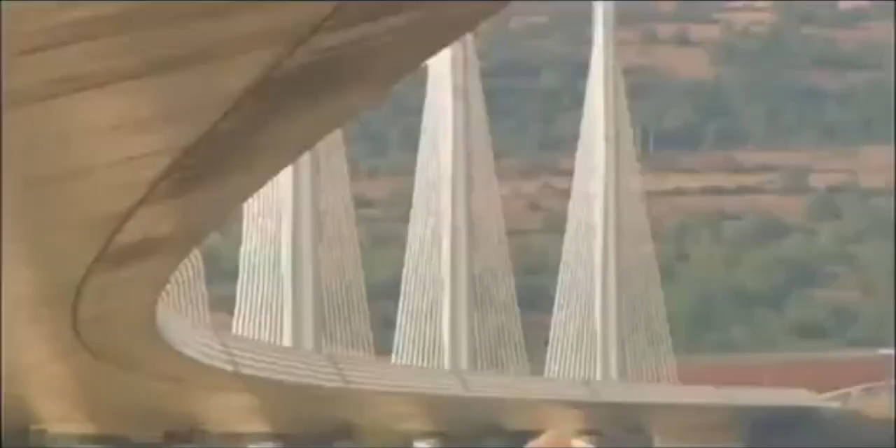This is the Millau Viaduct, the tallest bridge in the world. Its highest tower stretches a staggering 343 meters. So high, the bridge glides above the clouds. But this is a megastructure they said couldn't be built. When I've shown first the drawing of this bridge, they really thought I was crazy.

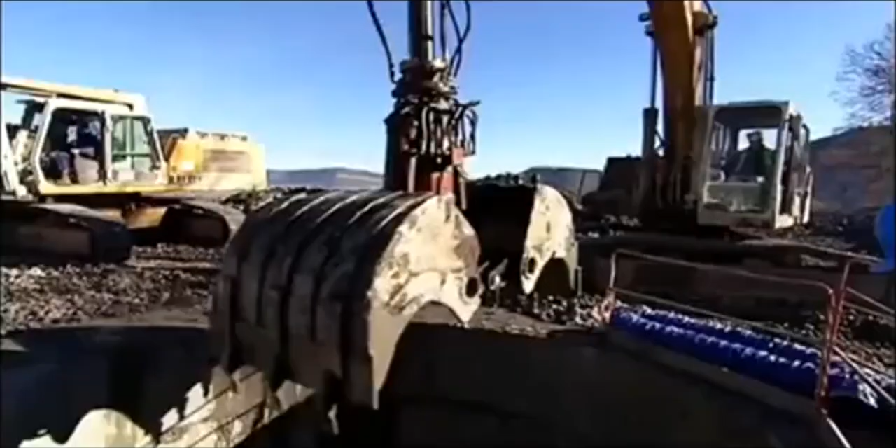The team attempting to build this amazing freeway in the sky had to survive landslides, fight winds gusting at 130 kilometers an hour, and weather massive storms as the bridge simply hung in the balance. It's a bridge that pushes the boundaries of engineering to the limits, and then beyond.

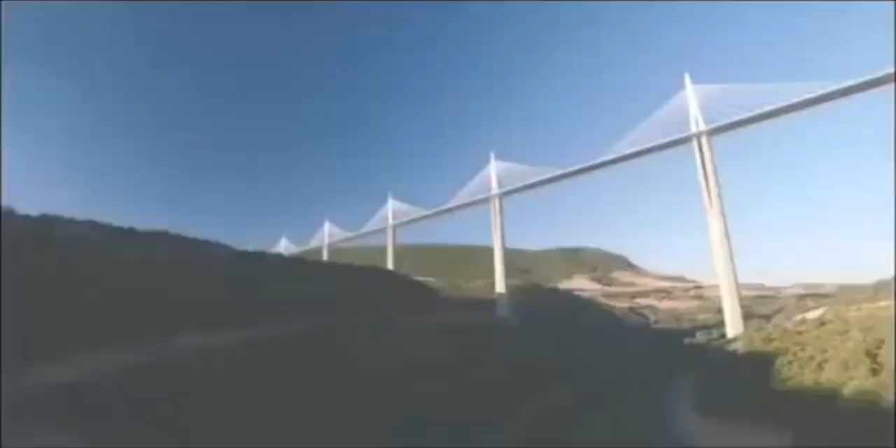Imagine building a series of Eiffel Towers, then slinging a 4-lane highway between them, all the way across one of the deepest valleys in France. Impossible though it sounds, that pretty much describes the building of the Millau Viaduct.

From the start, the construction team faced 3 daunting challenges. 1. Build the tallest bridge piers in the world. 2. Put a 36,000-ton freeway on top of them. And 3. Erect 7 steel pylons, each weighing 700 tons.

And what's more, they had to do this hundreds of meters above solid ground. So high that if you were on top of the Eiffel Tower, you'd still be looking up at this awesome bridge.

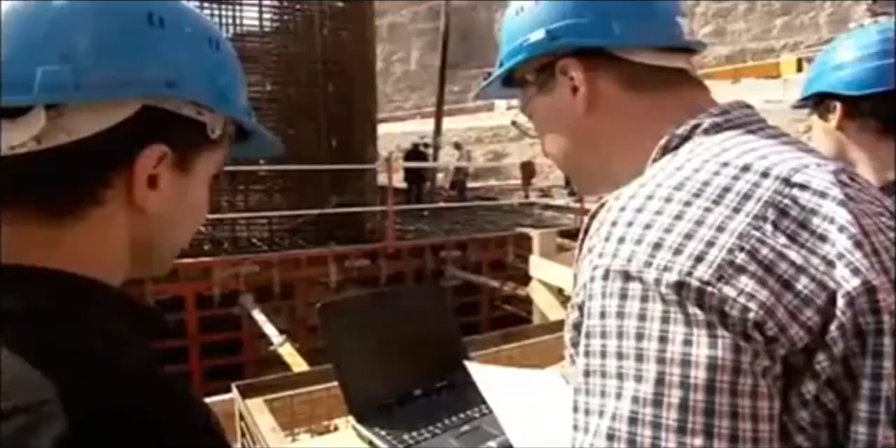October 2001, the team break ground. They're required to build a bridge that'll last for 120 years. And to win the contract, the teams promised to build it in record time, less than 4 years. By comparison, the world's longest suspension bridge, the Akashi Kaikyo in Japan, took a full 10 years to build. To up the ante, any delay will cost them $30,000 a day in penalties.

There are 7 piers that are numbered from the northern end of the valley. Number 1 will pose problems because of the steep slope. Number 2 will be the biggest challenge since it's the tallest. Crossing the river, number 3 is not much shorter. Then 4, 5, 6, and 7 climb the gentler slope to the south.

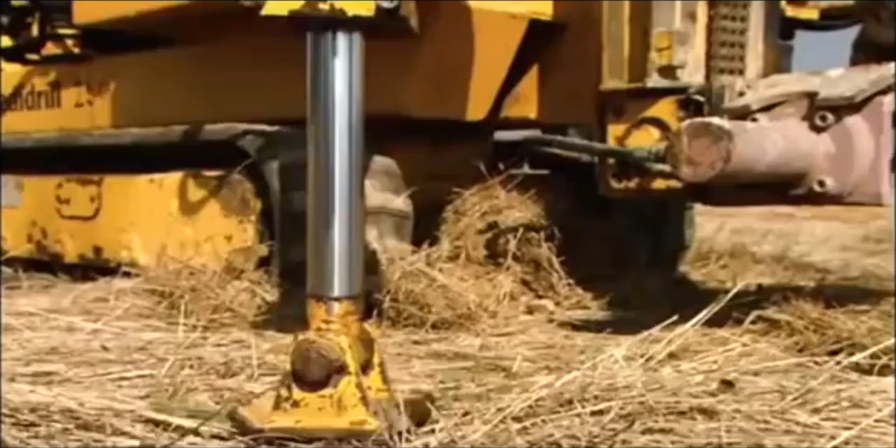To begin, the team had to bury the foundations deep in the bedrock in order to support the enormous weight the bridge will place on them. But the forces of nature were stacked against them. Geologists have warned of the risks posed by the region's fractured limestone. The rock is full of cavities that are essential to the local cheese economy. These cave systems, close to Millau, are home to a unique bacteria responsible for the blue mold in the world-famous Roquefort cheese. But what's perfect for cheese could be disastrous for a megastructure.

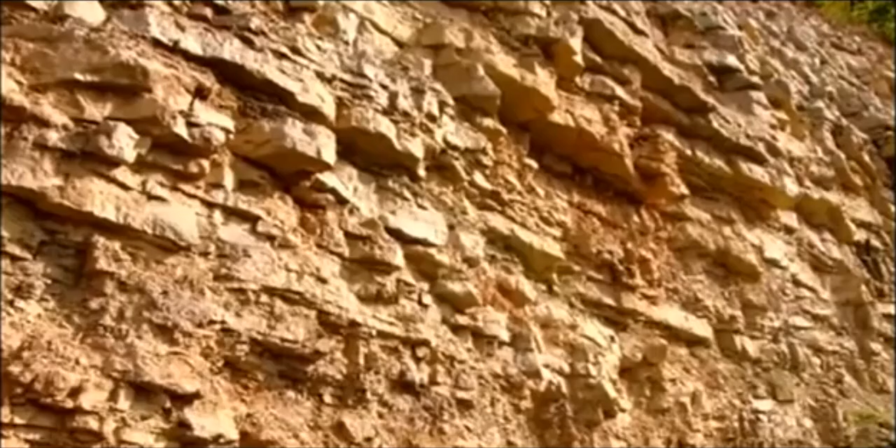The geologist's diagnosis spelt one thing: landslides. This kind of catastrophe could jeopardize the entire project. Despite the warnings, building went ahead as planned. Then, well into construction, as predicted, a dramatic storm causes a landslide. 4,000 cubic meters of rock collapse around Pier 1. Fortunately, the fallen rock doesn't damage the pier, but the warning is clear. They're forced to divert precious manpower and equipment to stabilize the slope and prevent a repeat collapse.

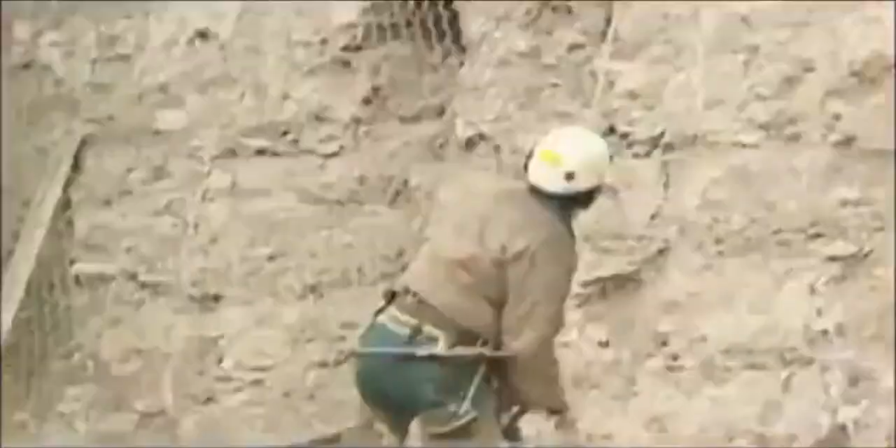So if the area is prone to landslides, why did they build the world's tallest bridge here in the first place? The answer is simple. In the 1980s, France built a freeway linking Paris directly with Spain. This major artery headed south across the French countryside, while from the Mediterranean, the freeway headed north, until they both hit one of the deepest valleys in France and stopped dead. Welcome to Millau, France's least favorite bottleneck.

The town of Millau is in the mountainous region of the Massif Central, one of the most tranquil parts of France. But in summer, this poor medieval town suffered traffic hell. The locals couldn't take it anymore. Neither could their mayor. It was terrible for our reputation. When you hear every day on the television and radio, avoid Millau, there's a traffic backup, a 5-hour wait in Millau.

And it's not just the people of Millau. Two drivers, Jamila and Jemima, crossing the 30-odd kilometers between the freeway on either side of Millau, reveal exactly why this bridge is needed. Jamila, in car 33, will cross the new bridge, while in car 22, Jemima will take the old road across the valley floor.

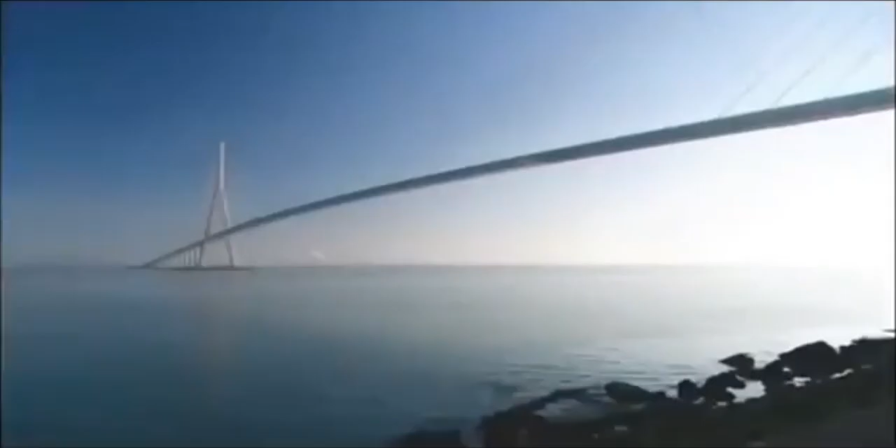It's clear exactly why the bridge was needed, but it took the French government a very long time to get round to building it. 12 years before construction began, up in Paris, the Ministry of Transport first came up with a plan. Their head bridge builder, Michel Virlogeux, is no ordinary engineer. He's a man who thinks big, very big, like the Normandy Bridge in northern France, the longest cable-stayed span in the world.

With this record-breaking structure completed, Virlogeux was on to his next, Millau. His plan, another cable-stay bridge, but pushing the technology beyond anything previously attempted, with piers 4 times higher than the Normandy Bridge.

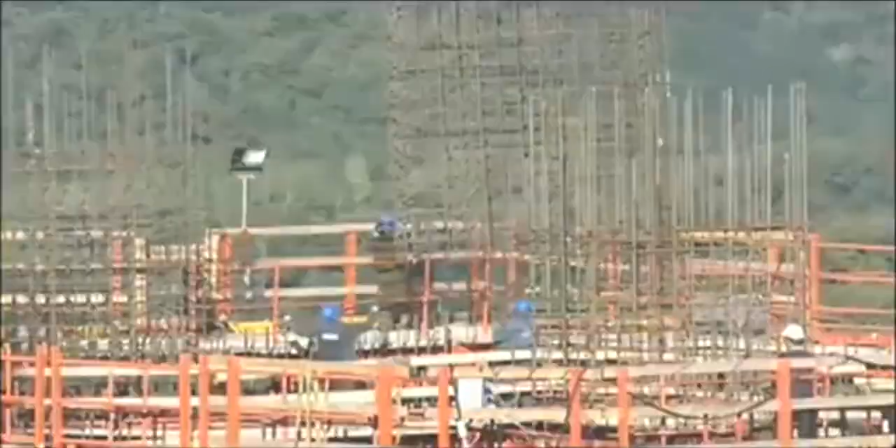The Millau Bridge would not only be the world's tallest, it would be unlike any bridge ever constructed. When I first showed the drawing of this bridge to the competent authorities, they really thought I was crazy. Virlogeux's Normandy Bridge has 2 sets of cables supporting the deck. But he wanted to up the stakes for Millau by losing 1 row of cables, so the remaining line would be forced to do twice the work.

More dramatically, the 2.5-kilometer Millau Bridge, instead of having a single main span, needed a whole series of piers to support it across the valley. No bridge builders had ever attempted a multiple-span, single-line cable-stay bridge on this scale before. The French authorities had a problem. Nervous about Virlogeux's groundbreaking scheme, they held a competition inviting other engineers and architects to compete with different designs.

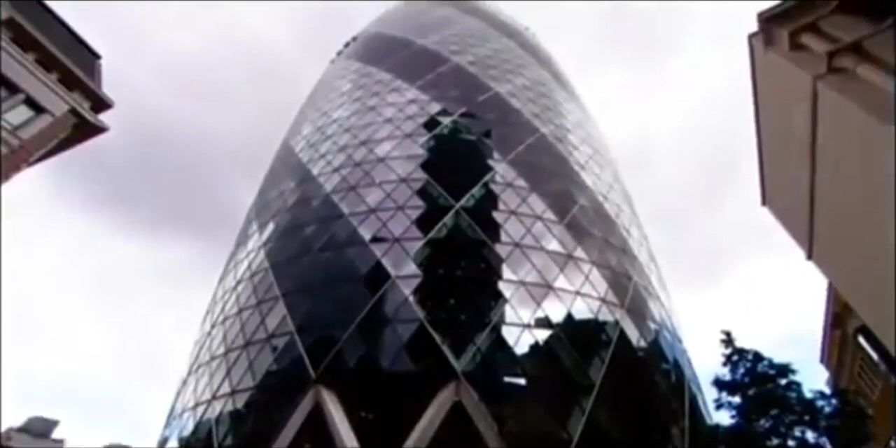The winner, Lord Norman Foster, is one of the world's superstar architects. In Hong Kong, he built the world's largest airport terminal. In Barcelona, offices literally hang from a mast on his communications tower. This is a man who regularly contemplates the impossible and delivers. You know, it's the challenges, and it's one challenge on top of another, on top of another. And with Millau, one of the biggest challenges was making it fit into the landscape, given it's just down the road from the famous Gorges du Tarn, France's equivalent of the Grand Canyon.

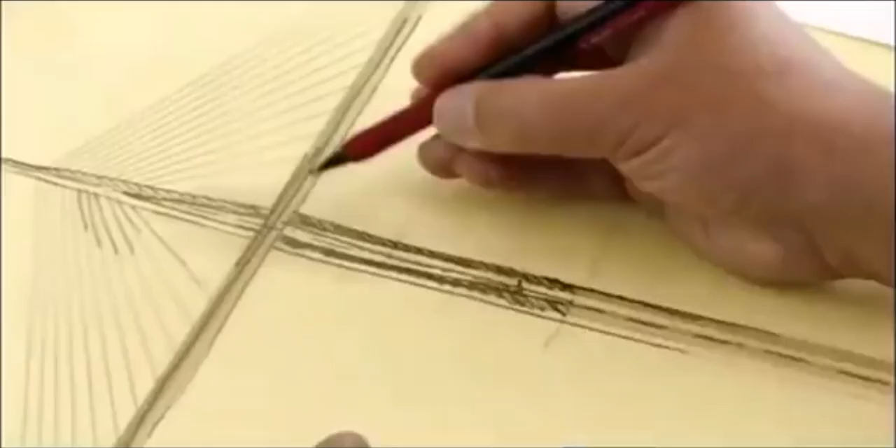How do you make something which has to be so immensely strong against the forces of nature look very gentle, very delicate? How do you weave something on that scale into the most unbelievable landscape? Ironically, Foster's answer was to take Virlogeux's pioneering scheme, then push it one stage further. He turned an elegant piece of engineering into a delicate work of art by boldly cutting out 2 of the 9 original piers and seriously slimming down the remaining piers and road deck. Foster wanted the bridge to appear as delicate as a butterfly, but this butterfly has to support the weight of 5 Eiffel Towers in gale-force winds hundreds of meters above the River Tarn. Getting the design wrong would be a disaster.

Then, with Millau still on the drawing board, Foster's record as a bridge builder suffered a major setback. His Millennium Bridge in London is actually another record-breaking structure, the lowest profile suspension bridge in the world. But when this footbridge opened to the public in June 2000, it was a public relations disaster. Crowds walking over it set up a resonant frequency, and the bridge began to sway. As people adjusted their step to the small initial wobble, the effect was magnified.

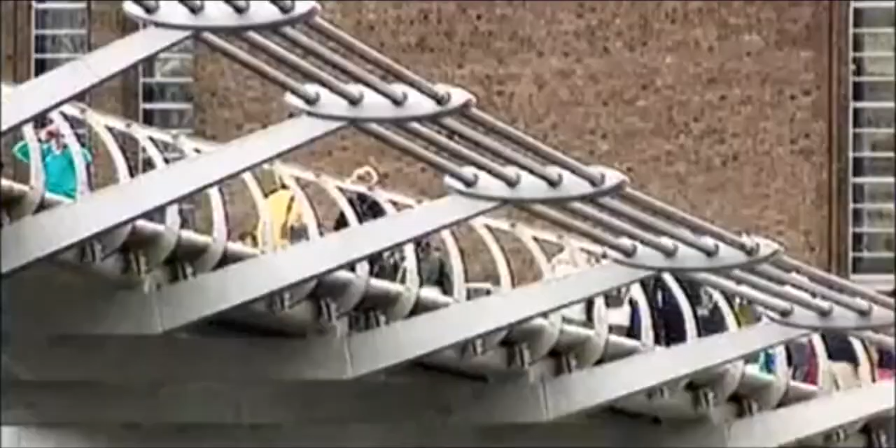Though it didn't threaten the structure, the swinging motion became so dramatic, the authorities closed the bridge for a refit that took 1.5 years and ended up costing over $8 million. It was a bad omen for the Millau Bridge, where construction was soon to begin. And at 15 times the height, a design flaw would be a catastrophe.

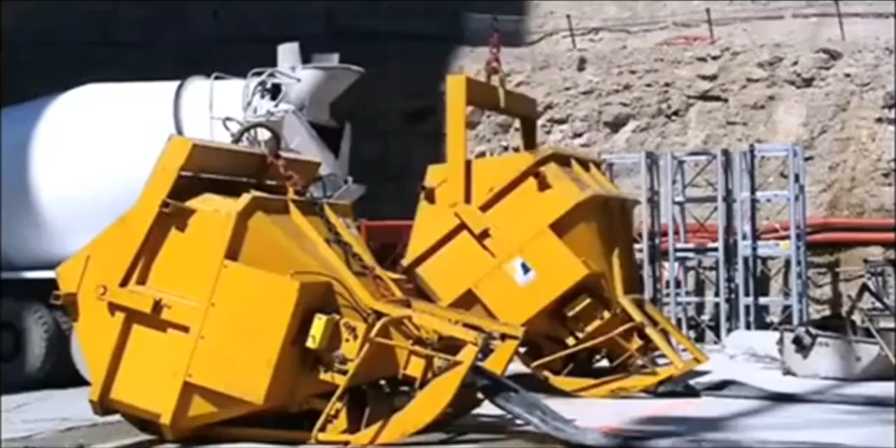December 2001, France's Millau Viaduct, the tallest bridge in the world, is under construction. Everything about this project is supersized. It'll need 200,000 tons of concrete, so much that the team have to build a concrete factory on site. But there's nothing straightforward about this concrete. The formula must be just right. It needs structural strength to support the massive loads it'll have to bear. But it can't set too quickly, as it has to be hoisted into position and poured hundreds of meters in the air. And it needs to be just the right color to suit Norman Foster's vision.

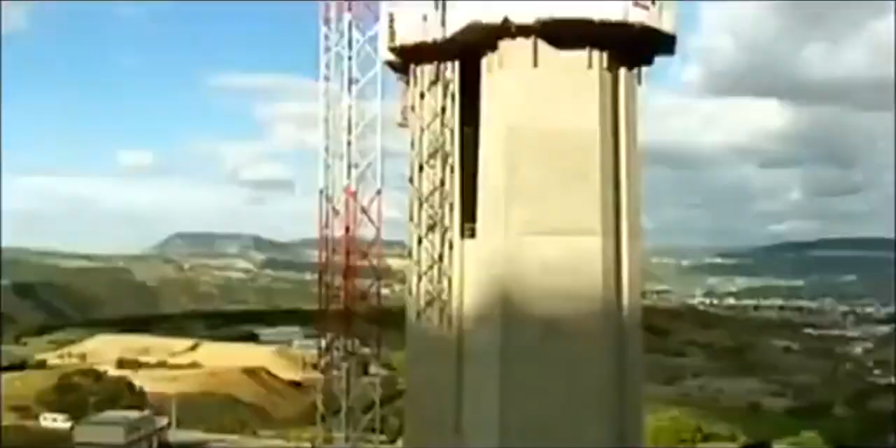In fact, the architect's vision has created a headache for the construction team. He's designed each pier as a complicated geometric shape, tapering the entire way up, with vertical grooves set into them to create shadows. But what's just a line on paper for the architect was a major challenge to build. The enormous piers are built step by step by pouring concrete into a temporary mold. To give the required strength, the molds are filled with a frame of steel reinforcing bars. In total, 16,000 tons of these steel bars are hoisted into place and secured. Laid end to end, they'd stretch the 4,000 kilometers from Millau all the way to Central Africa.

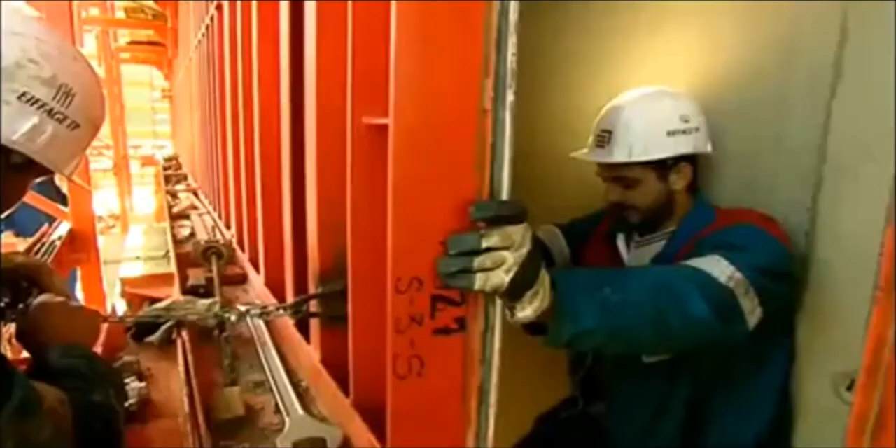The shape of each pier is seriously complicated. As a result, each time they remove the sections of red steel shuttering, they have to change the shape of the mold to fit the profile of the next 4-meter section. Manhandling these steel panels, weighing up to 15 tons apiece, is no picnic. And with the combined height of the 7 piers totaling well over a kilometer, they have to change the shape of the mold over 250 times.

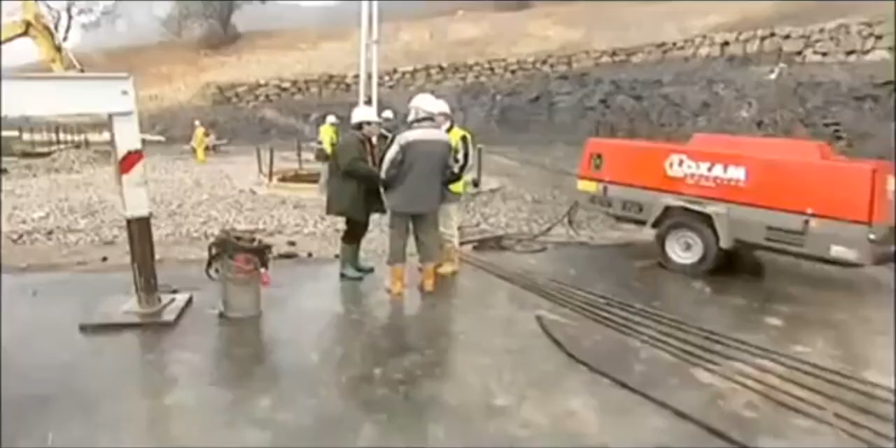Every 3 days, each team on each pier went through this whole cycle. Then they repeated the process. But it was a race against time, with a permanent threat of delay. Keeping the entire build on time and to budget was the daunting responsibility of one man, Jean-Pierre Martin.

If instead of 3 days we took 4, imagine that multiplied by the number of castings. We'd end up with a 3 or 6 month delay. With a penalty of nearly $1 million a month, this isn't something Martin wanted to contemplate. And this schedule wasn't his only headache.

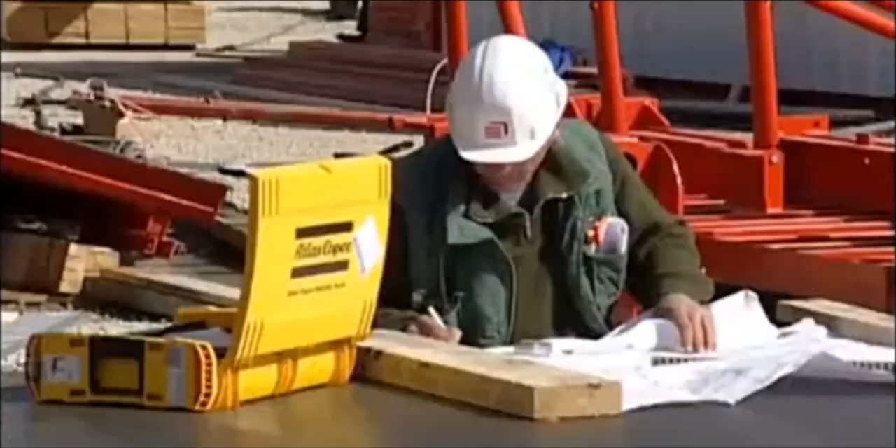You have to be pinpoint accurate when you're building the tallest bridge piers in the world. Get it wrong, and the bridge simply won't fit together. Just 10 centimeters out, about a hand's width on each 4-meter section, and the tallest pier could be 6 meters off at the top, the width of a jumbo jet fuselage.

Each team was aiming for a specific point in the sky. For Pier 2, this was exactly 245 meters above the ground, 546 meters from the north side, and 1,914 meters from the southern end. There was no room for error.

The only chance they had to get it right was with GPS, accurate to within 4 millimeters. Using signals from multiple satellites, the team could pinpoint their position and make sure they're on target for that critical point in the sky they needed to hit.

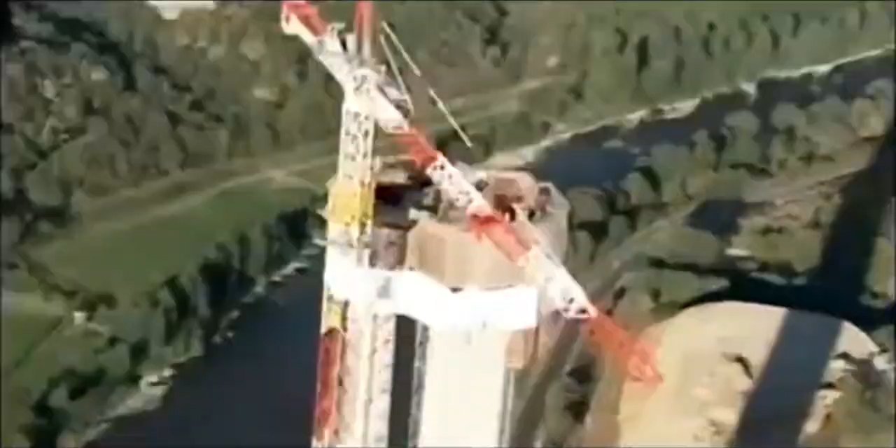Month after month, the piers climbed higher. Finally, by November 2003, they reached their full height. At 245 meters, Pier 2 becomes the highest bridge pier in the world. But is this record-breaking pillar where it's supposed to be? Amazingly, it's dead on target, to within 2 centimeters.

Champagne corks pop. It's time for a major celebration. Against all the odds, they were 1 month ahead of schedule, but the team couldn't afford to relax. The next stage of the project would be the most difficult part of the build.

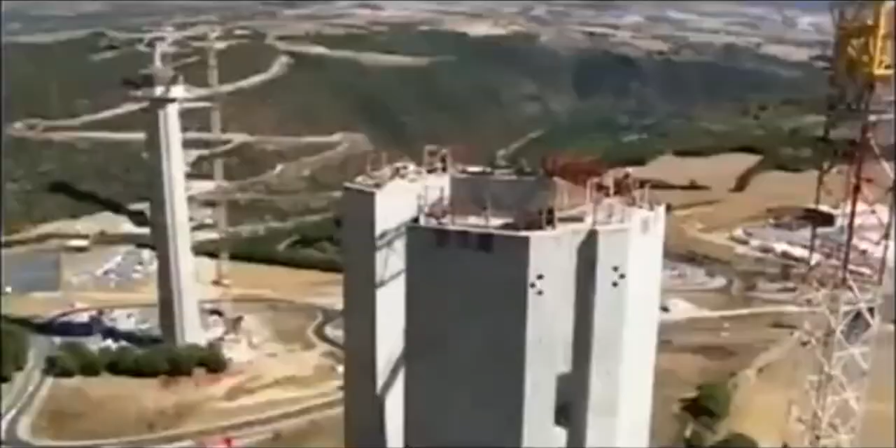Phase 2 of building the world's tallest bridge involved putting a 2.5-kilometer roadway weighing 36,000 tons on top of the piers, a full 270 meters above the River Tarn. Bridge builders know danger comes with the territory, but working at these heights can be lethal.

More than 34 died constructing New York's Brooklyn Bridge. 35 died in 1970 on the Westgate Bridge in Melbourne, Australia. And 1 year later, 13 workers were killed when the Koblenz Bridge in Germany collapsed into the Rhine.

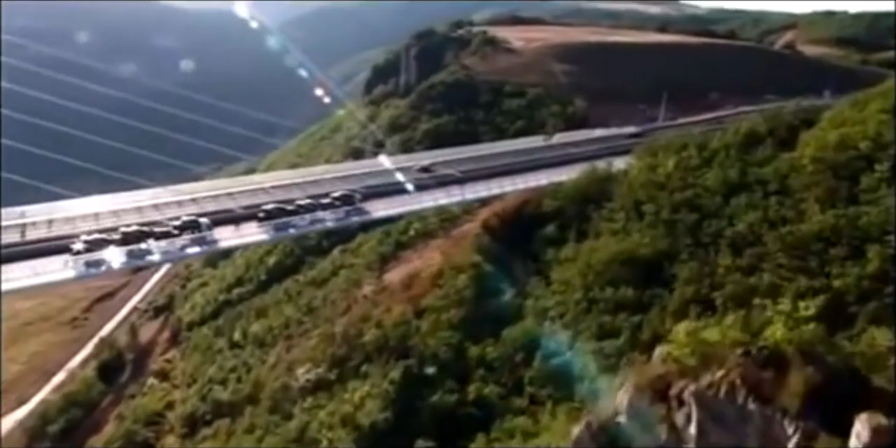With these fatalities in mind, the team decided to fabricate the entire road deck on the safety of solid ground. This meant building it in steel, which in theory would be much safer than lifting vast concrete sections hundreds of meters into position. There's only one problem with this plan. No one had ever put a road deck on piers anything like this height before, let alone over a 2.5-kilometer span.

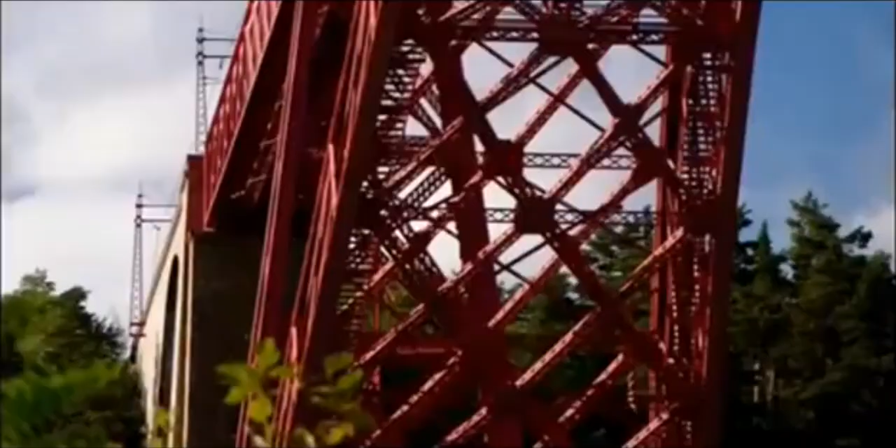In the end, only one steel manufacturer had the courage to take on this colossal challenge. Eiffel, the steel firm set up by the great French engineer. Eiffel built what was once the tallest bridge in the world, the Garabit Viaduct in southern France, before getting round to the framing for New York's Statue of Liberty and, of course, his signature tower in Paris.

But despite the company's experience, Eiffel's director, Marc Buonomo, knew he was taking a serious risk. It was a gamble for the company, because if there had been a mistake, if it hadn't worked, it would have been the whole company.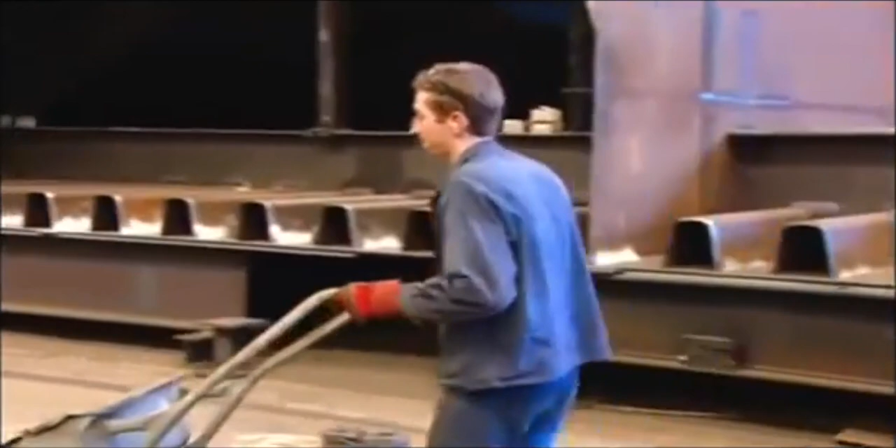They fabricated the massive sections that would make up the road deck in the company's steel factories. This immense jigsaw puzzle involved manufacturing 2,200 separate sections, weighing up to 90 tons, and some of them 22 meters long. Their accuracy is measured with a laser to within a fraction of a millimeter.

The huge square tubes are the central spine that should make the deck rigid. The triangular side panels will be welded on either side to create the width for a 4-lane highway. To meet the punishing schedule, Buonomo automated the manufacturing with a 2-headed welding robot and a plasma cutting machine.

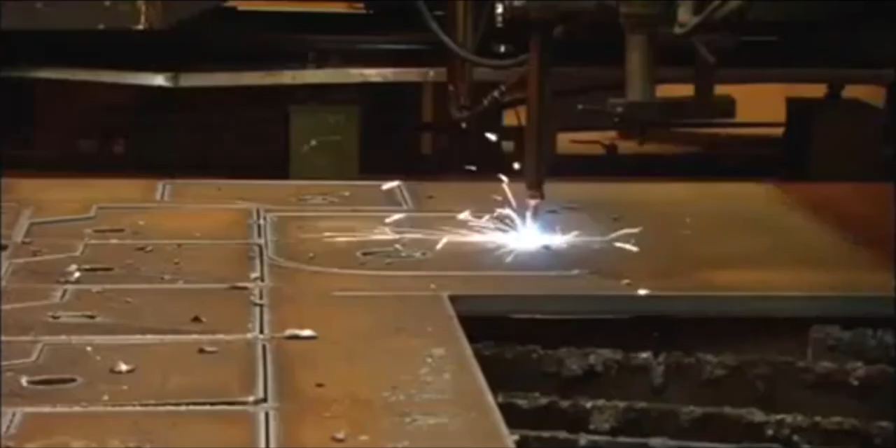Each cutting pattern or template is programmed into the computer. Then the machine automatically blazes its way through the steel. The torch reaches a scorching 28,000 degrees centigrade. That's 5 times the temperature of the Earth's inner core.

But cutting and welding was the easy part. The hard part was getting these monster sections the hundreds of kilometers from the factories to Millau. The routes had to be planned with precision to avoid major damage. The police coordinated safety and clearances.

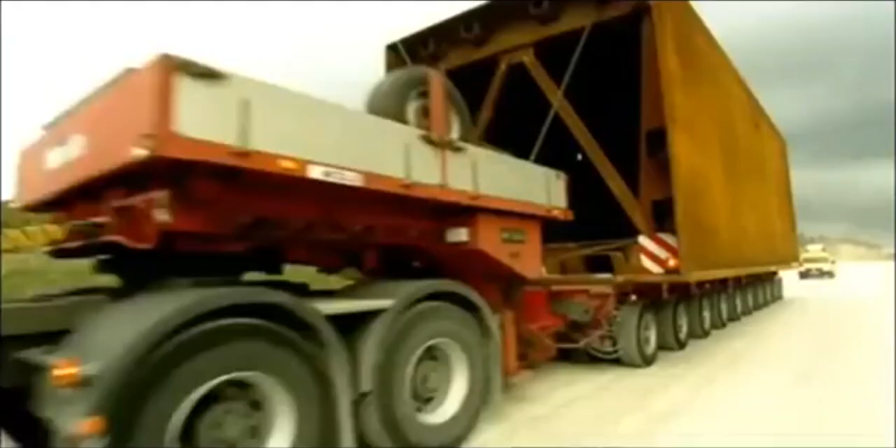Even with that level of preparation, some obstacles felt as if they're cutting it just too close for comfort. And this was no one-off event. To build the viaduct took over 2,000 of these extraordinary road convoys.

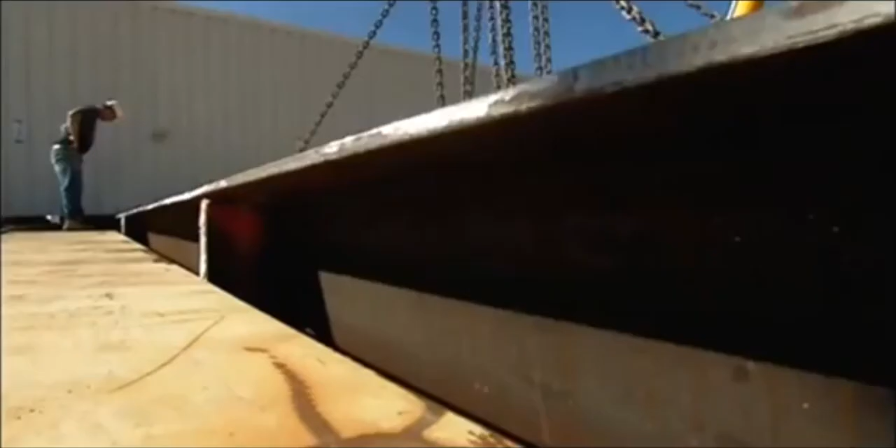The components arrived at assembly plants set up, one on either side of the valley. Here, the pieces of a massive jigsaw puzzle were welded together to form the 2 halves of the deck. But getting these 2 halves to span the valley, on top of the world's tallest bridge piers, would be a major challenge. They'd be the first team to put a road deck on a pier taller than an 80-story skyscraper.

And pushing bridge building beyond anything attempted before, they planned to slide the entire 2.5-kilometer road deck over in 2 colossal pieces. The bridge's chief engineer, Jean-Marie Cremer, was one of the few people who believed it could be done. All the engineers who know this method, who were in the know, didn't believe it was possible. If the team had got their calculations wrong, the entire structure could collapse into the valley.

We found a solution for the construction, which was to launch the bridge from the 2 sides. One part on the Larzac Plateau, one on the Causse Rouge. And to push them from the 2 sides, and to make them come and meet here, above the River Tarn.

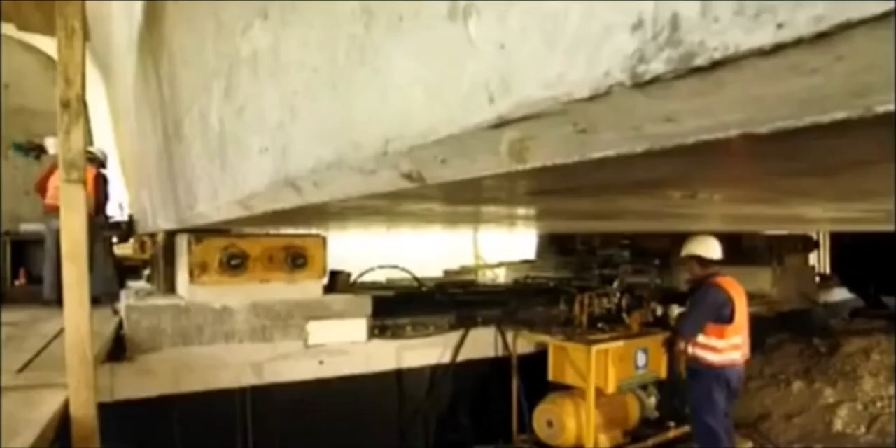Smaller bridges use a similar technique. A powerful set of hydraulic rams literally pumps the deck from one side to the other. But Millau would be the longest launch ever attempted over the highest piers in the world, and the results could spell disaster. The deck is so slender, it would bend and collapse if it were pushed out over the 342-meter spans between each pier. The furthest anyone's previously managed is less than half that distance.

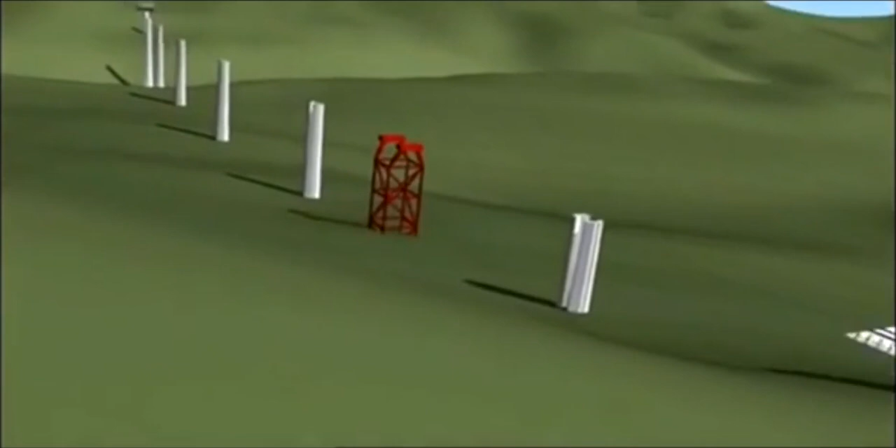The first part of the solution was simple. Fit a pylon so its cables support the front of the deck as it goes out over the valley. Then construct temporary steel support towers that halve the spans to a more manageable 171 meters. These steel towers were a construction feat in themselves. The largest, over 170 meters high, is the tallest ever built, and they needed to carry a massive load.

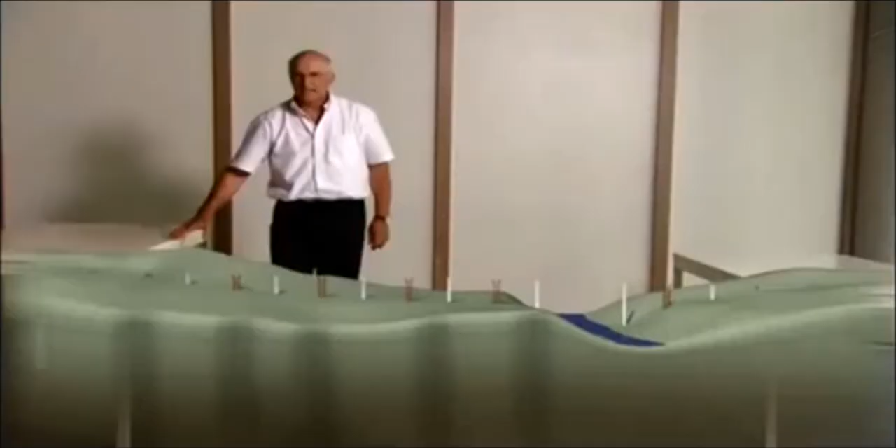7,000 tons as the leading edge of the deck, together with the first 90-meter pylon, slide over. And simply pushing this enormous weight over the top of the vulnerable piers would bring them crashing to the ground. This was the nightmare scenario. If we'd done a conventional launch, we would have knocked the piers over like the pins in a bowling alley.

Someone needed to reinvent the way this type of bridge is built. And it's Marc Buonomo with Jean-Marie Cremer who came up with the breakthrough. The basic principle can be demonstrated with a heavy box and a wobbly table. With a normal launch, you knock over the piers. I want to advance the deck over the pier, but if I push the deck from here, I'd knock over the piers, because they're so tall.

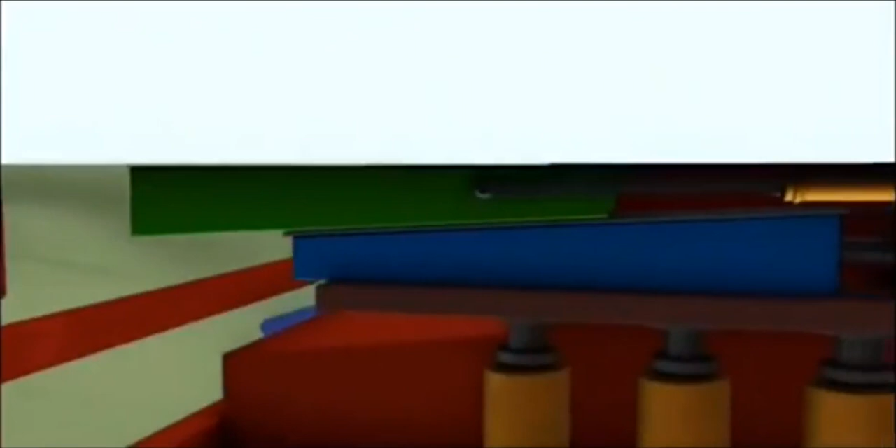The idea is to install a launching system on top of the pier, and that way, if I push the deck, it has no effect on the stability of the piers, and the piers won't fall over. The trick is to use a series of these launching systems to jack up the deck and inch it forward. Each system uses two wedge-shaped blocks under each side of the deck. The upper wedge is pulled forward by a hydraulic ram.

It slides up the slope of the lower wedge at the same time, lifting the deck from its supports and advancing it 600 millimeters. The lower wedge then retracts, dropping the deck onto its supports. The upper wedge returns to its original position, and the whole cycle begins again. 4 of these clever devices are placed on each pier, all programmed to work at exactly the same time. The result is that together, they pick up the entire roadway and shunt it forward.

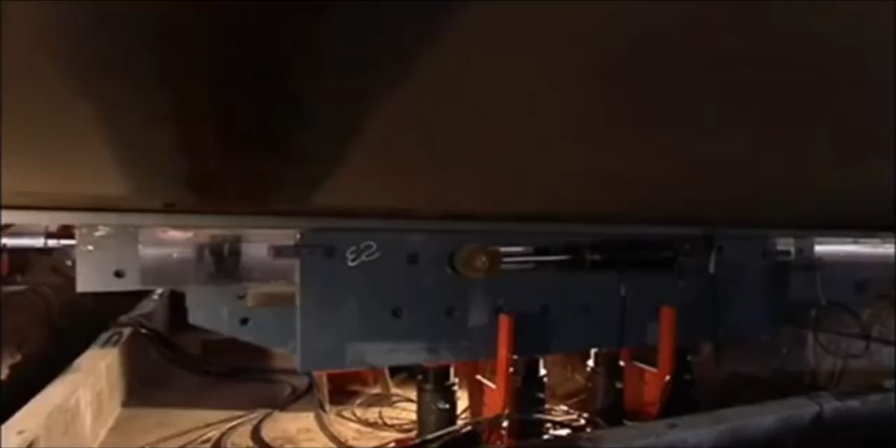But if one fails or gets out of step, it could spell disaster. The force could push the bridge piers apart till they collapse. When you're up there and you see Millau 300 meters below you, you ask yourself, was this a good idea? The future of the entire project was now hanging on a prototype, and it had never been tested.

It's the morning of February 26, 2003. Do or die day for the world's tallest bridge. Everything is about to be put to the test. The flexibility of the deck, the strength of the temporary piers, and critically, the pioneering hydraulic ram system. Even Buonomo, the man in charge of the launch, had his doubts. As it had never been done before, I have to tell you, I had fears that it wouldn't work.

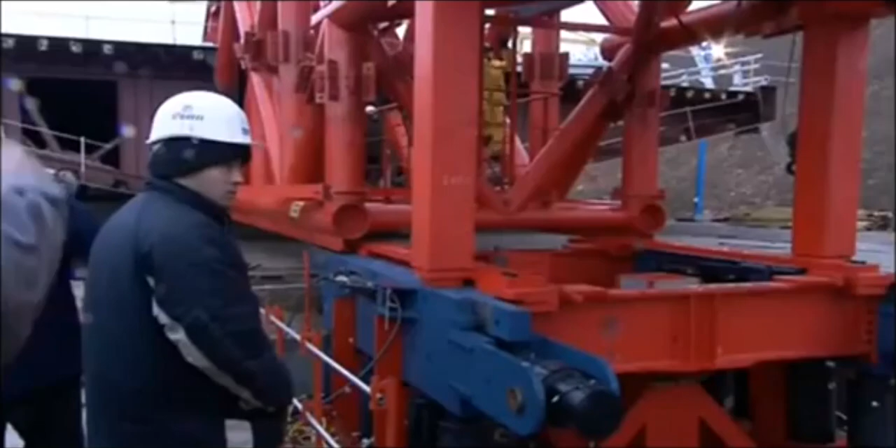The pumps kick in, the pistons start to push, and the deck begins its huge journey across the valley. The moment I heard the motors start, I put my finger on the deck, and I could feel my finger move. Every 4 minutes, the deck advanced 600 millimeters across the valley. Surveyors tracked its progress. But it was still a nail-biting time as they watched the unsupported deck crossing the void.

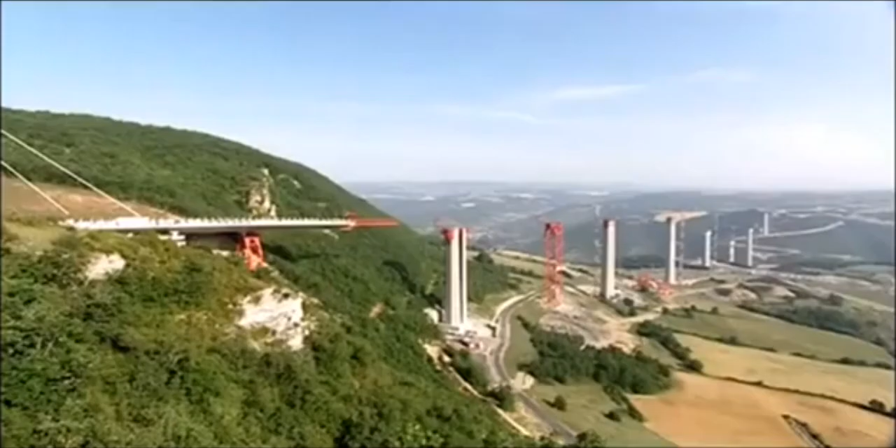Eventually, the deck reached the safety of the first pier. 204 meters down, only 2,256 to go. The launching system seemed to be working as planned. The engineers were feeling optimistic.

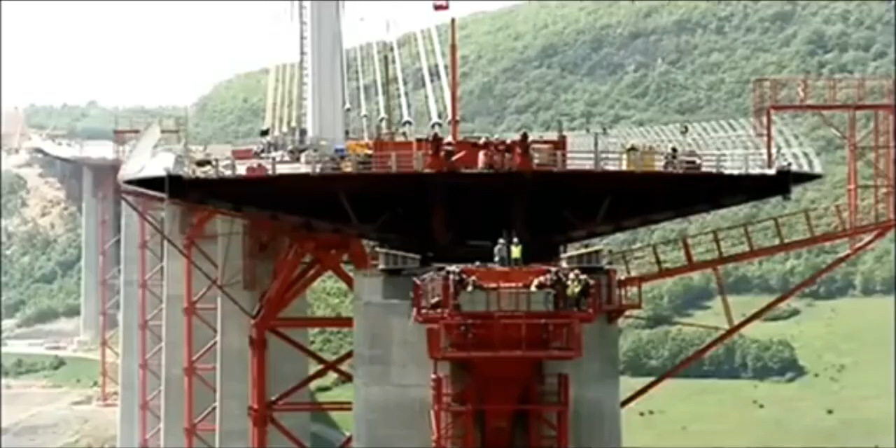But as the deck advances into space, it'll become more vulnerable to the wind, which can reach 130 kilometers an hour. Unfortunately, the road deck has the shape of an upside-down airplane wing, and the team's greatest fear is that this wing could simply take off.

The engineers kept a close eye on the wind and weather conditions. When they were satisfied there was a 3-day weather window and the wind wouldn't exceed 85 kilometers an hour, they'd give the construction team the go-ahead, and the deck launch could continue. The reason for this precaution is simple. Strong winds can literally tear a bridge apart.

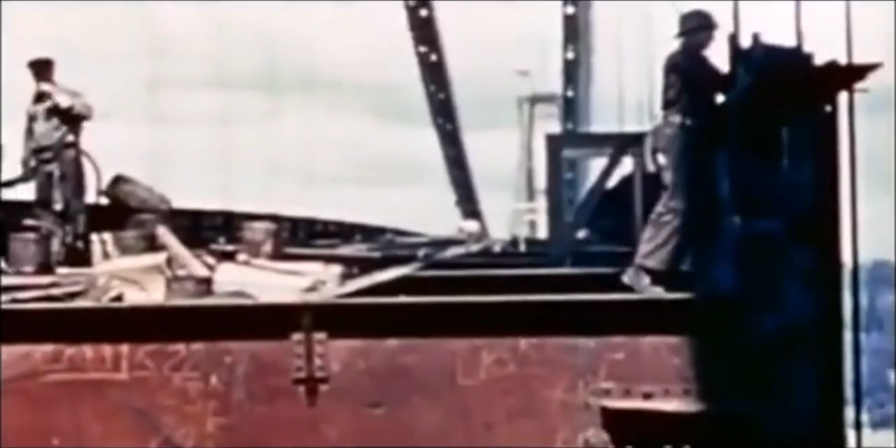In 1940, Washington State built a suspension bridge across the Tacoma Narrows in the U.S. Northwest. It opened with a grand ceremony on July the 1st. But the celebrations were short-lived. The bridge had a major problem: the wind.

Girders beneath the deck, designed to make the bridge rigid, actually blocked the wind, causing the roadway to ripple alarmingly. Locals soon dubbed it Galloping Gertie. On the 7th of November, with the wind less than 70 kilometers an hour, the bridge begins to twist violently. At 11 a.m., time runs out for Galloping Gertie. The wind sends the bridge crashing into the river.

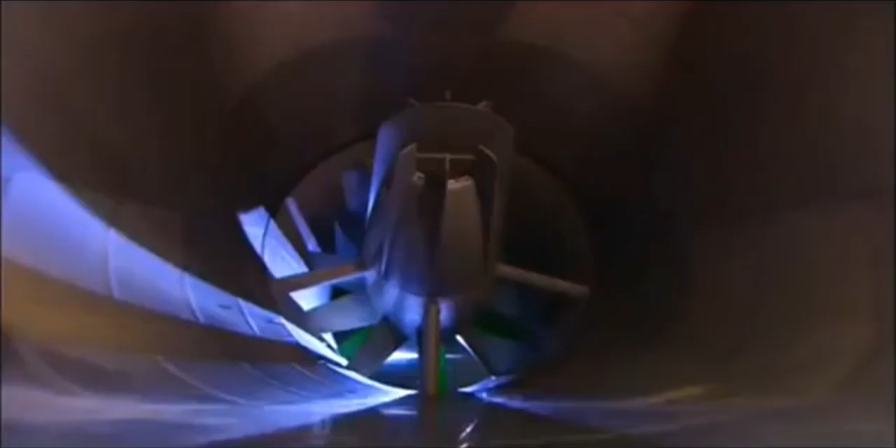Wind tunnel testing is now standard procedure as a direct result of Galloping Gertie. For the Millau Bridge, they analyzed the wind in the Tarn Valley over 18 months, then recreated those conditions in the wind tunnel. Wind engineer Olivier Flamand was shocked by the results. The average wind speed was relatively low, but because there's such strong turbulence, it created very fast peak winds.

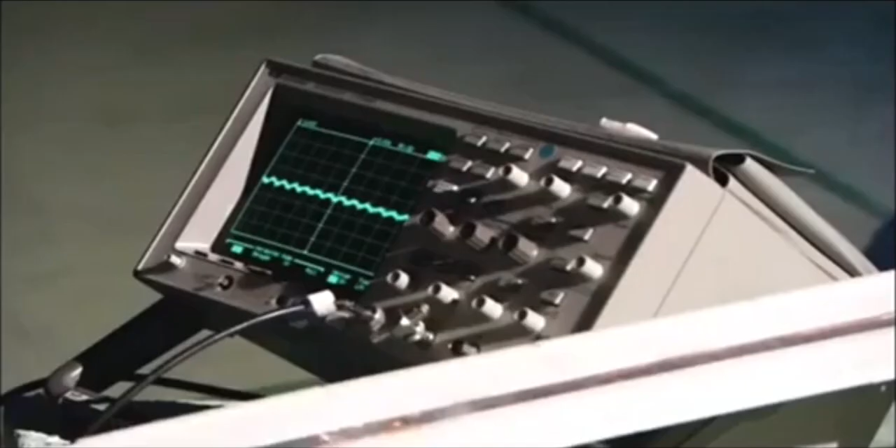The rugged terrain creates serious turbulence at the height of the road deck. Winds peak at 130 kilometers per hour. That's hurricane force. They tested every aspect of the bridge to analyze the risks: piers, pylons, and critically the deck. But it's not just the aerodynamics of the finished bridge. They needed to find out how it would behave when it was most at risk, during the launching of the deck.

Olivier and his team reached a chilling conclusion. The winds they've measured are strong enough to blow the unsecured deck off its supports and send it crashing hundreds of feet to the valley floor. And then the nightmare began. On the 22nd of August 2003, 6 months into the deck launch, one of the launch systems failed, leaving the deck hanging in the wind. To make matters worse, the weathermen were predicting storms.

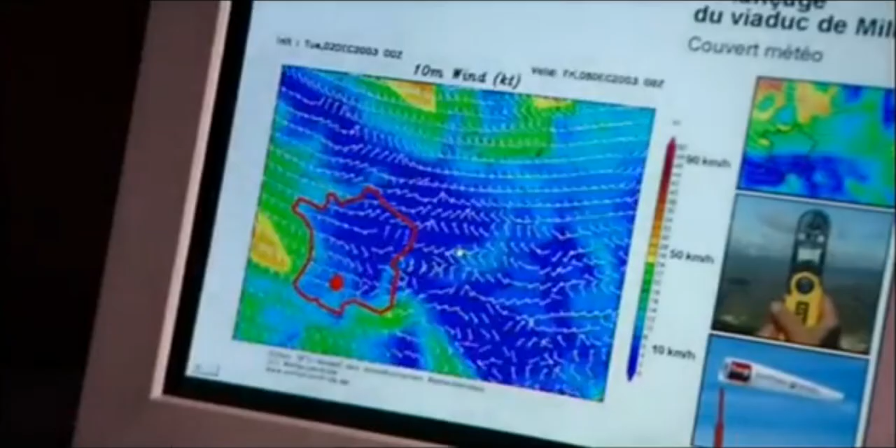So far, these massive pushing machines had worked perfectly. But the fact is they were prototypes, and due to the frantic schedule, they'd never been tested. The problem was that the non-stick Teflon between the sliding surfaces had ripped, and the friction generated was too much for the hydraulic rams to push against. Unfortunately, no one had planned on replacing parts of this monster machine mid-launch on the top of a massive concrete pillar. This was very bad news for the man who staked his reputation on this system.

It was maximum stress, like poison in your mouth. You don't forget that. Re-examining their calculations, they realized the cause of the problem. It underestimated the forces between sliding surfaces, but they wouldn't be able to repair it without the necessary spare parts. The clock was ticking, and Marc Buonomo needed a solution fast.

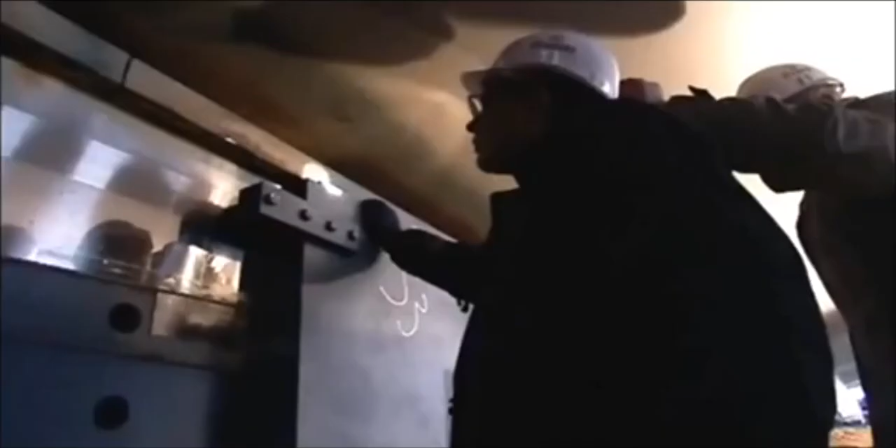When Apollo 13 came back with that incident, the NASA engineers requested they did the inventory of everything there was on board to know how to fix it. The Millau team did an inventory. They realized that the other launching machines, not yet being used, could be stripped to provide the new Teflon surfaces they needed.

Working all through the night, the team extended the access platform. This allowed them to take out the 5-meter-long, 2-ton steel wedges, replace the Teflon, and reassemble the launching machine. By 8 a.m. the next morning, it was ready to resume the launch.

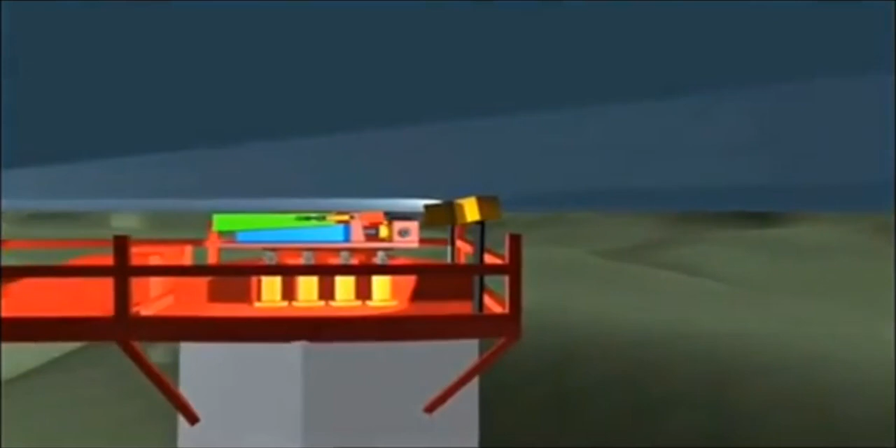The rest of the week, the predicted storms arrived, and another set of launching machines wore out. So when the deck finally made it to the safety of the next pier, the team breathed a major sigh of relief. You don't forget that. I won't forget that for 4 hours I was really scared.

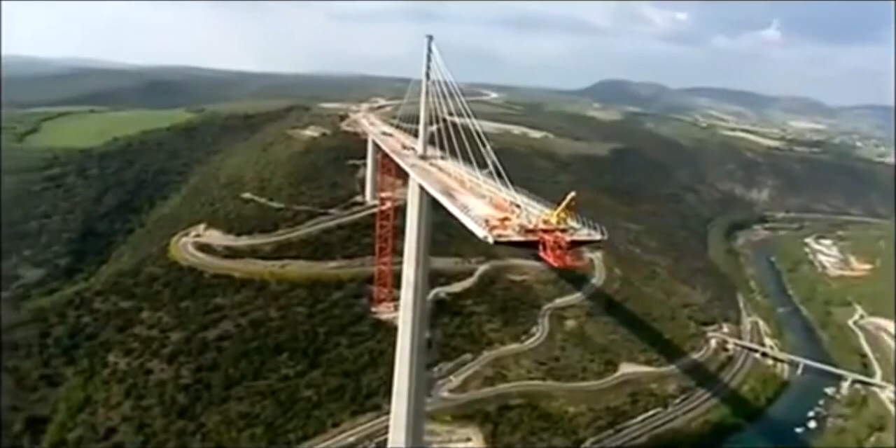The two decks continued their journey across the valley. Day after day, week after week for a full 14 months, they approached each other, millimeter by millimeter. By May 2004, they'd reached a critical phase. From the northern end, the shorter deck had traveled 717 meters into space to reach its final resting place. From the south, the longer deck extended over 1.5 kilometers. Only the section over the river, the one point where it was impossible to erect a temporary pier, divided them.

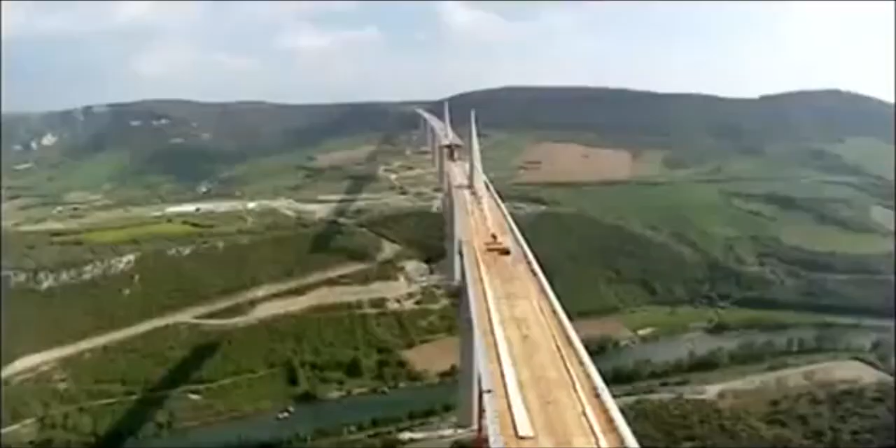But would they meet as planned? If they've got their calculations wrong, they'll have built the biggest white elephant in Europe. Even the man behind the whole project had his doubts. I was not convinced at all that the two parts of the deck could meet exactly with a perfect geometry. The odds were against them. Calculating such a feat so precisely is a Herculean task.

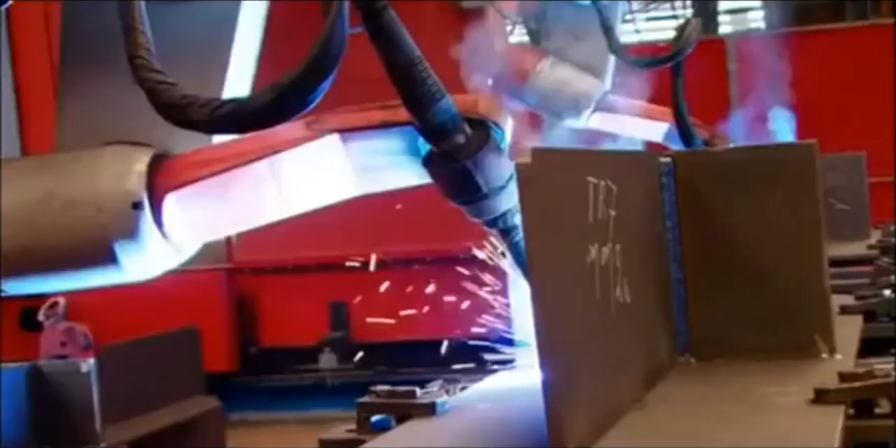Firstly, the two starting points on the northern and southern slopes of the valley are at different heights. Secondly, the bridge has a subtle curve to it. As a result, each steel panel which makes up the road deck had to be cut and welded with extreme precision. It would be an engineering triumph if they got these two sloping curved decks to meet as required.

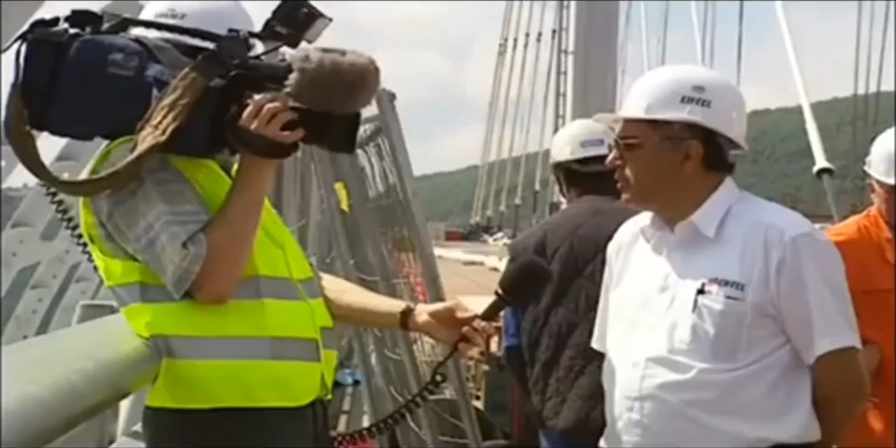The team checked the weather reports. With the wind inside safety limits, they gave the go-ahead for the final push. The rams began to drive the deck's leading edge off the safety of Pier 3 towards its destination. At this point, a total of 21 launching systems needed to move at exactly the same moment to avoid disaster. If anything were to go wrong now, the man responsible would be Marc Buonomo.

Everyone asked me, how can you be sure that it will go straight? So to be sure that they were going to the right place, I had a GPS put on the front, so I could see the gap between the theoretical and the real position. Over the next 2 days and nights, the deck advances 600 millimeters at a time towards its final resting place. The world's media are watching the critical meeting of the decks. And to add to the pressure, the French Prime Minister is due to drop in to celebrate the event.

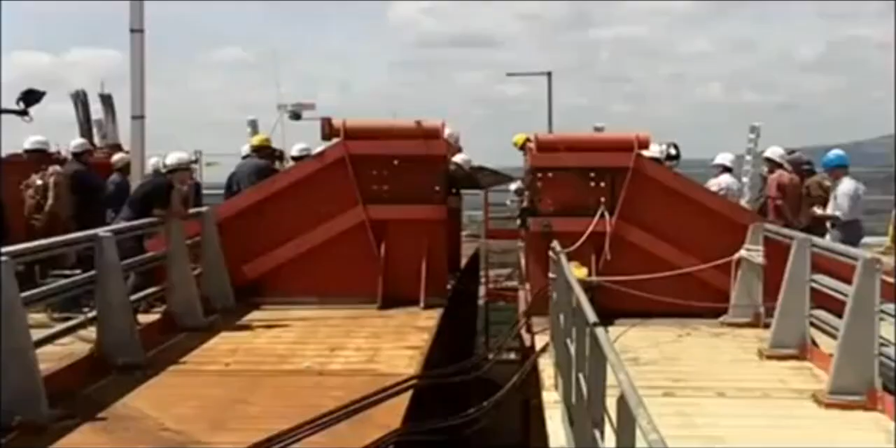The deck pushes forward. Now, with only centimeters separating the two sections, a magnum of champagne is hung between them to mark the moment. At last, union. The two massive steel decks have traveled high over this valley, a total of 2.5 kilometers, and when they check, they're aligned to within 1 centimeter. That's accurate to within 99.9999%. All the measuring, all the calculations have paid off. They've nailed it.

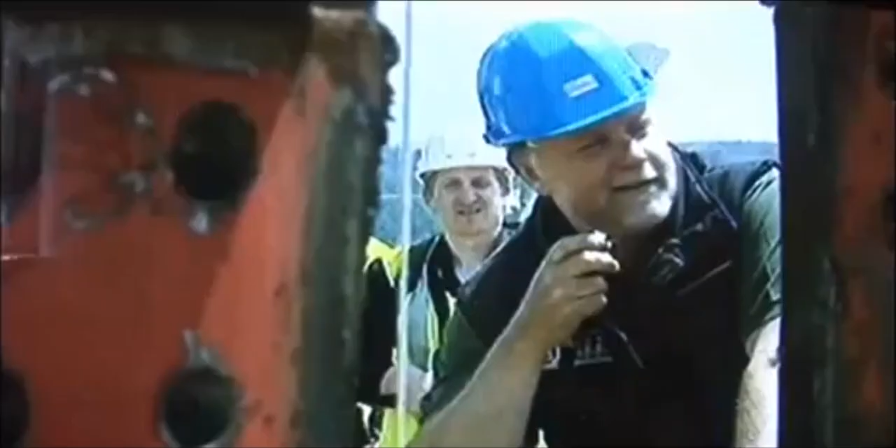The meeting of the decks was a special moment. News reports traveled round the world, and in Salzburg, Austria, they reached Felix Baumgartner, aka Fearless Felix. Felix has made a career base jumping from some of the tallest structures on the planet, and within 24 hours he'd driven to Millau and was calculating the logistics for the jump, factoring in his two main aims, to avoid arrest and death.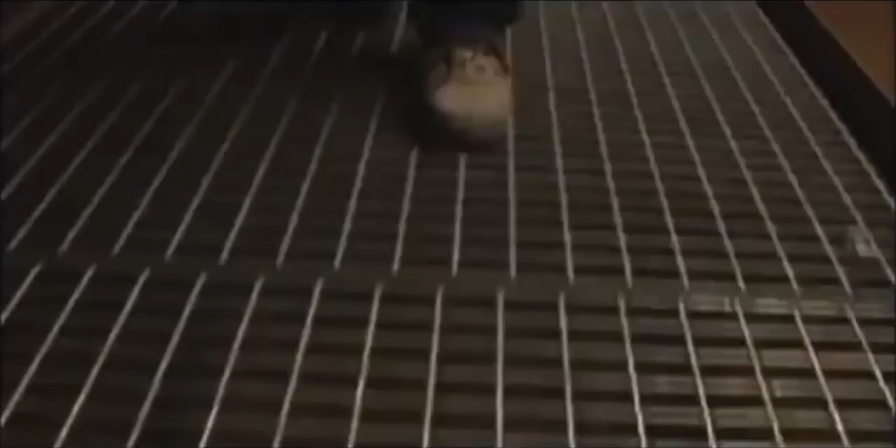Baumgartner waited for darkness before arriving on site. He found his way to the base of Pier 2, then climbed an access ladder the full 245 meters to the top. He entered the steel road deck and found a place to hide until daybreak. He had to remain concealed until the sun was high enough for his cameramen to record his world record attempt.

At 7 a.m. the following morning, Felix the Conqueror emerged. He took a cool backward flip off the tallest bridge in the world and entered the record books. The tallest bridge in the world, 250 meters. I did it. And having evaded death, he made sure he's not caught by the police.

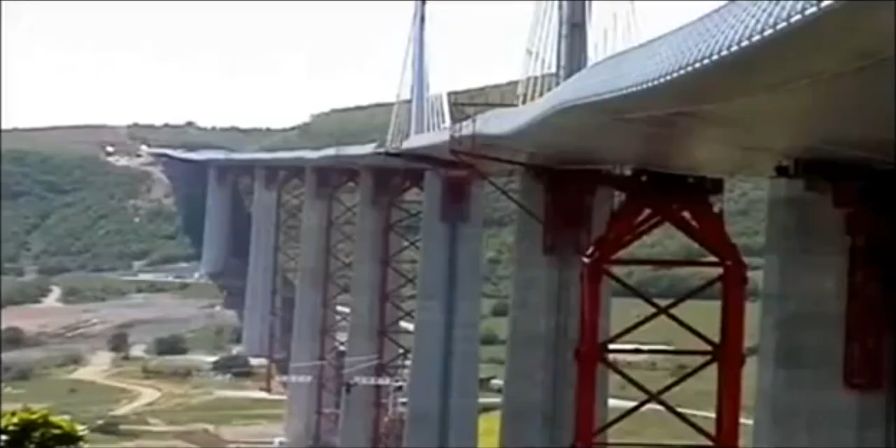The decks have been joined, and the team have reached the final phase of the project. But there was still a race to meet the schedule, and their problems weren't over yet. Everyone could see the dramatic undulations in the flexible steel deck. Even some hardened bridge builders wondered about its structural integrity. It was a huge surprise for everyone. All the engineers said, we knew steel was flexible, but not that flexible.

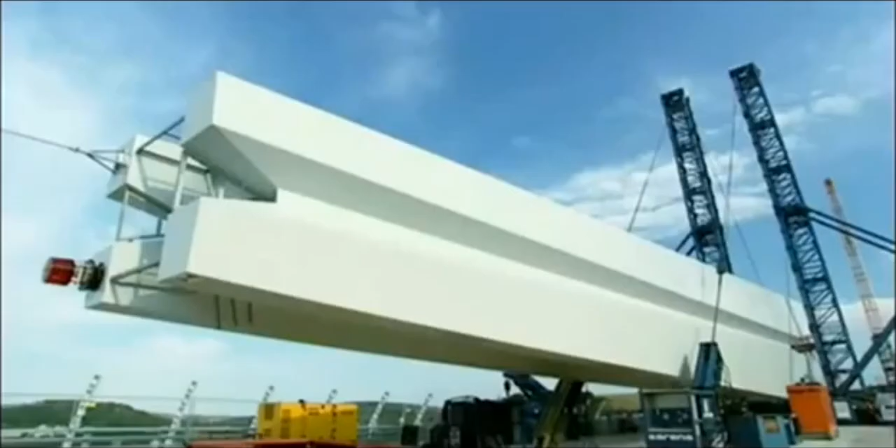The team were relying on the pylons and cables to pull the deck straight. Each massive pylon is 90 meters high and weighs 700 tons, the equivalent of 85 London buses. Placing them in position on the slender deck, high above the valley floor, would go beyond anything ever attempted. Once again, Marc Buonomo had a plan. You know, the first people to make vertical pylons were the Egyptians. Buonomo adapted a technique used in ancient Egypt to erect obelisks in the sands.

On top of the road deck, the team put up two enormous steel towers, both of them secured by cables and equipped with a hydraulic system capable of raising 1,000 tons. The 700-ton pylon is then lifted by the hydraulics. As it rises, it pivots little by little until it's vertical. It's then lowered safely onto its anchorage point. Buonomo's 4,000-year-old technique worked to perfection.

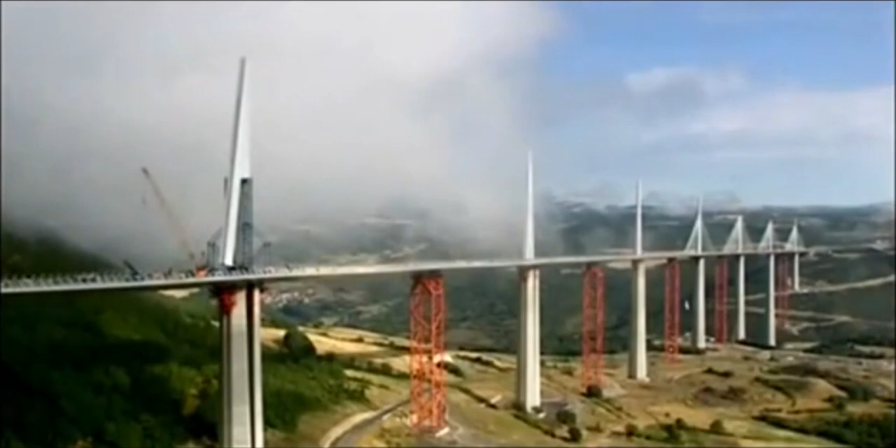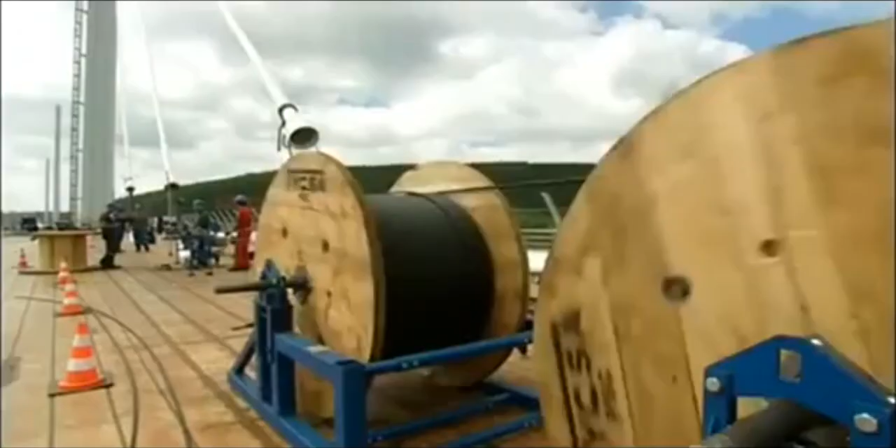With all 7 pylons in place, the team could attach the cable stays that would straighten the rippling deck and give it the strength to cope with full traffic loads. They hoped. The weight of the roadway is now over 40,000 tons, the equivalent of a cruise ship, and the 154 cable stays should prevent it from sagging or collapsing. The strongest stays are made up of 91 individual steel strands and have a breaking strength of 2,500 tons, strong enough to hold back 25 jumbo jets, all at full throttle.

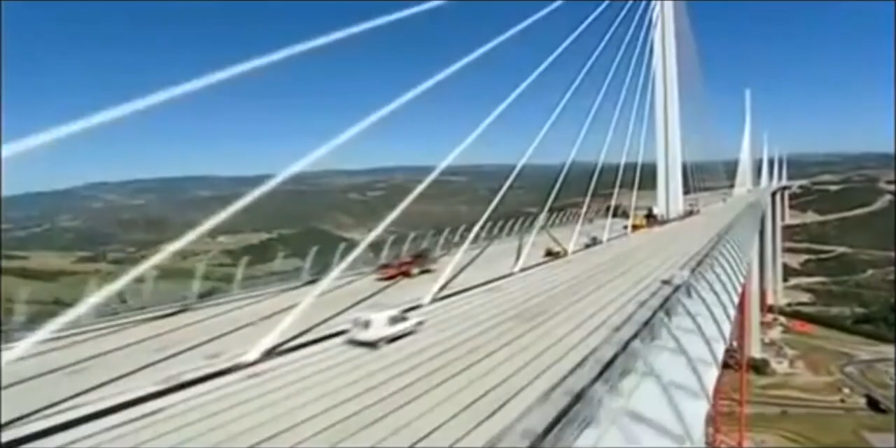As the cable stays are tensioned, true to plan, the ripples in the road deck are pulled straight. Over the 2.5-kilometer deck, the ripples are now no larger than the size of a thumb. They're finally on the home straight. The road surface goes on, adding a further 10,000 tons to the load. That's like driving 153 battle tanks onto the deck. But before it could open to the public, the team needed to know the bridge is safe. It would have to pass one crucial test.

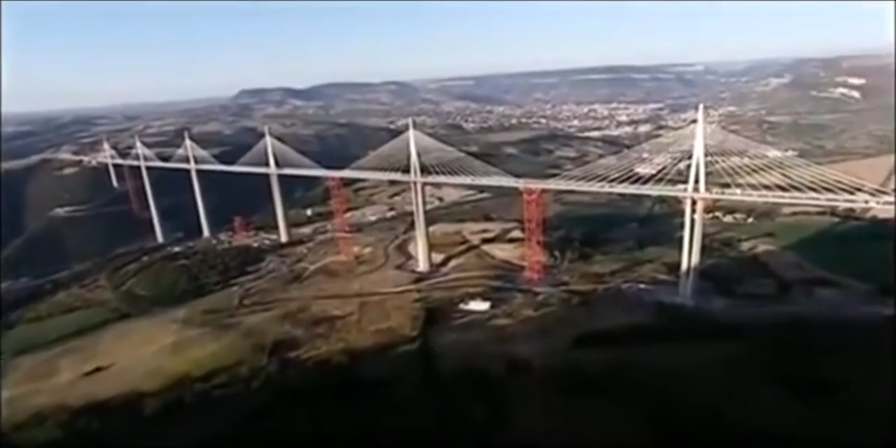After 3 years, the construction team building France's Millau Viaduct, the world's tallest bridge, are about to find out if they got their calculations right. On a single-span cable-stay bridge like the Normandy Bridge, a large load on the main section is no problem, because the cables are attached to solid ground and can't give.

On the Millau Viaduct, with its 8 spans, the cables are attached to the deck of the adjacent sections. A load on one section will cause it to drop, pulling the stays down. As the pylons lean in, the matching stays are pulled upwards, lifting the neighboring decks and causing a dangerous rippling effect.

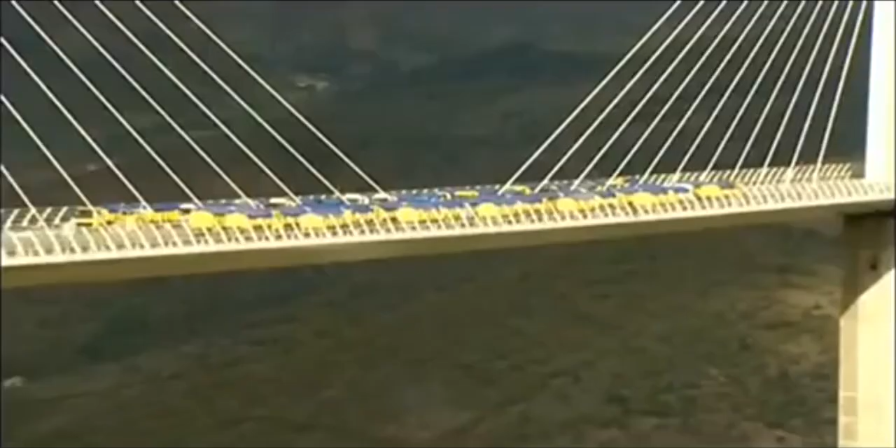It's right now the team put their bridge to the test. These 28 trucks have a combined weight of over 900 tons. They are now positioned in the critical point, mid-span. The engineers hold their breath. Measurements are taken. The span bends just 26 centimeters. This is a triumph for the engineers. The bridge was designed to cope with more than double that.

4 weeks later, on December the 14th, 2004, President Jacques Chirac officially opened the Millau Bridge. A proud moment for the whole of France. Just over 3 years of construction have produced the tallest bridge in the world, designed to last at least 120 years. And against the odds, the project manager even brought the job in on time. But that's not what he's most proud about. What I remember, because on construction sites there are often accidents, is that we had no serious accidents, nothing more than a minor injury.

As soon as it opened to the public, the bridge was an instant success. But the real test isn't till its first summer, and the French all take their annual vacation. No one ever expected anything like this. Numbers peaked at more than 50,000 vehicles a day. At over $7 per car, that's great news for the construction company, who are clawing back their $478 million investment in the project.

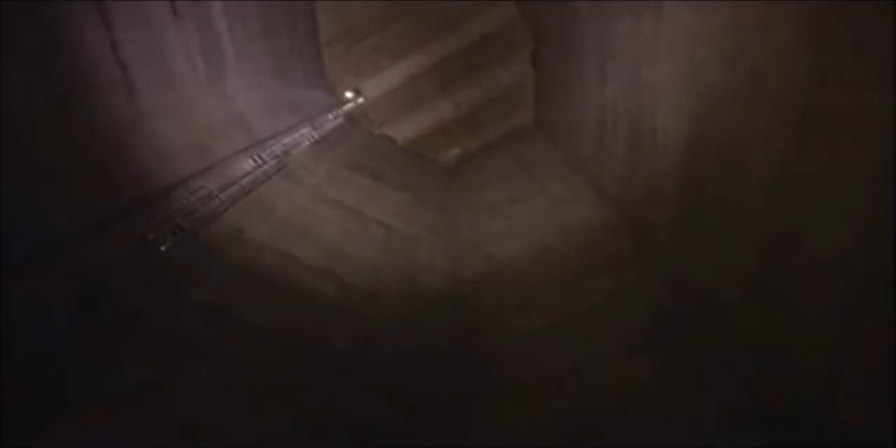This was an epic bridge to build, but it's just as epic to maintain. Thierry and Frank are assigned to P2, the world's tallest bridge pier. This structure is no solid concrete block. It's a series of vast hollow spaces. Their job today is to test the communication system and electric circuits on each of the 7 structural floors. This involves a 343-meter climb, going hand over hand up a ladder for the rest of the day.

By dusk, when Thierry finally reaches the summit of the pylon, he may be exhausted, but there is a payoff. You get a fantastic view from here, a 360-degree panorama. The tallest bridge in the world has become an icon. But this is creating problems no one had ever imagined. Locals have been taking over the bridge as a platform to get media attention for their causes. This crowd was hoping that driving sheep over this freeway in the sky would help them get more farming subsidies.

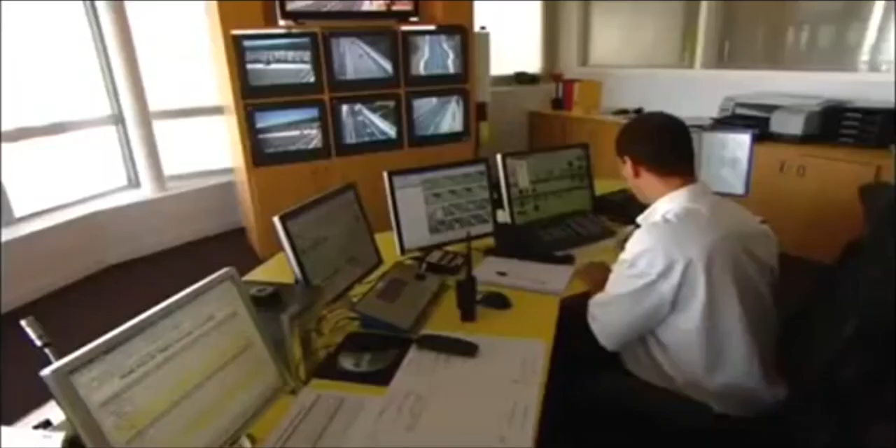Jose's job is to prevent this kind of incident from creating a danger, and on this bridge, the incidents keep on happening. An alarm triggered by a motion detection system means there's a stopped vehicle on the bridge. Immediately, Jose dispatches a colleague to deal with the situation. The last thing anyone wants is a multi-car pile-up on a 2.5-kilometer bridge, quarter of a kilometer in the sky. Jose zooms in his camera to reveal the man has left his car and is sitting dangerously on the crash barrier. The driver's probably only broken down, but already one man who stopped climbed over the wind barrier and jumped to his death.

Bruno intervenes. Thankfully, it's no more than an irresponsible photographer who's sent on his way. You could say the Millau Bridge is a victim of its own success. It's definitely become a major tourist destination. 700,000 visitors in the first 9 months. Fortunately, most of them wait till they're off the bridge to take their photos.

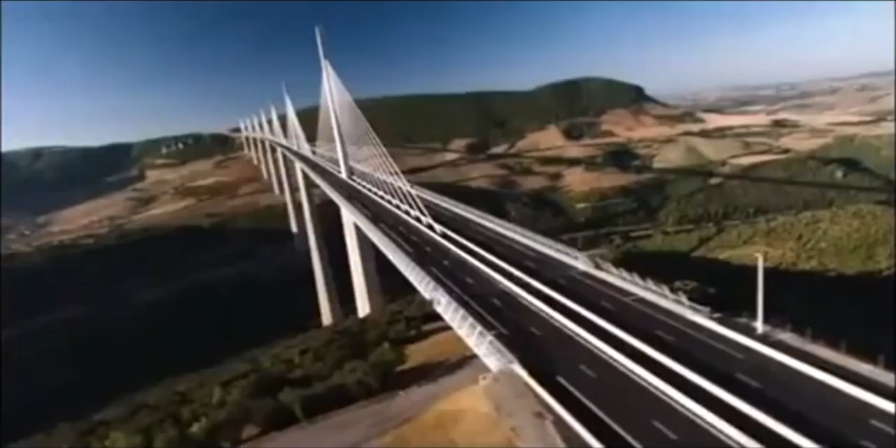It's magnificent. I came 600 kilometers today to see the Millau Viaduct. There's only one thing to say. It's extraordinary. They're drawn because it's a world-beating structure, but also because it's incredibly beautiful, delicate and minimal. Not what you'd expect from a structure that's nearly a third taller than any other bridge on the planet.

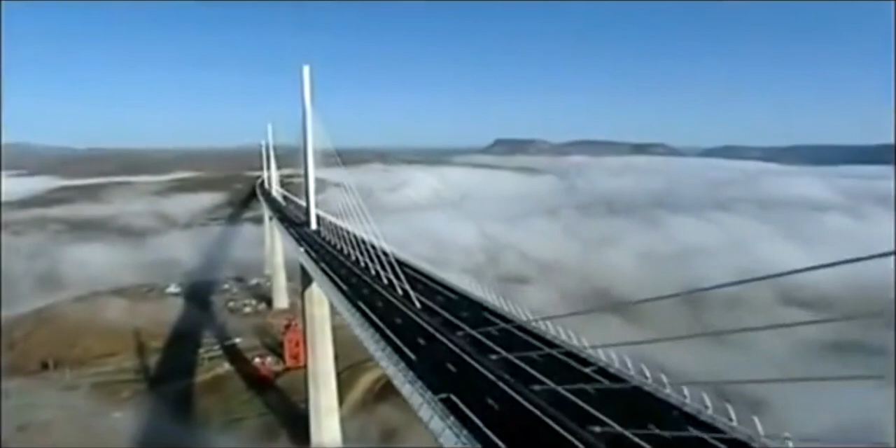And architect Lord Norman Foster's achieved his aim to give the driver the sensation of soaring. As you leave these plateaus, you do fly. You fly across this bridge. Literally, you are above the clouds. And the result certainly pleases the man who dreamt it all up. To see erected this bridge, which I imagined 15 years ago, it's something magic. This is the longest pure cable stay bridge in the world, the tallest roadway in the world, and of course at 343 meters, it is the tallest bridge ever constructed.